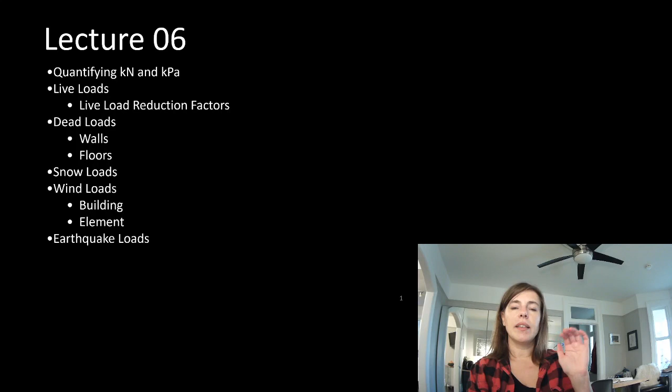So you guys are going to be jumping into the math today. This week and next week, not too bad. I'm going to ease you into it. The last few weeks are math heavy. I have tried to work it out that less of your assignments are weighted because of those heavy math ones. The last 2 weeks are probably the hardest math section, and those aren't marked assignments for you guys. I will give you assignments that you can work on and treat them as if they were assignments. You can even submit the answers. I'll even allow it to show you the right answers right away, but I'm actually going to give you the answer sheet so that you can go through, do it, but then when you're ready, go check the answers, and that's for the last 2 weeks.

You will need to know some of that for the exam, though. They really are kind of the culmination of the entire course, and we have no answers until the end of the last week. Even then, we only have answers for half of our strength equation. Remember, we need our reduced capacity to be greater than our factored load. By the end of this course, we'll be able to calculate our entire factored loads. Next term, we will figure out the reduced capacity. So technically, we won't have any final answers until the end of Structures 2.

So this week, we're going to actually start talking about loads. These are all the loads that happen on our building. We're going to do it in 2 parts because there's enough of it. This is probably the harder week where we have a little bit more information coming at you, and we'll do some math examples.

Obviously, the questions that you guys will have on your assignment are harder than the ones you'll end up with on your exam. The assignment is the place to make it seem the hardest. So don't get too overwhelmed. You will find that the exam is probably a step down in difficulty than the assignments. All of the content will be on there, but the whole point of the assignment is that it is the harder part, where you have the time and luxury to reach out to your TAs, check alternate examples, go back and look at your books, write it out 2 or 3 times, talk to your peers and say, hey, how did you work through this one? I tried it this way. You guys are allowed to communicate.

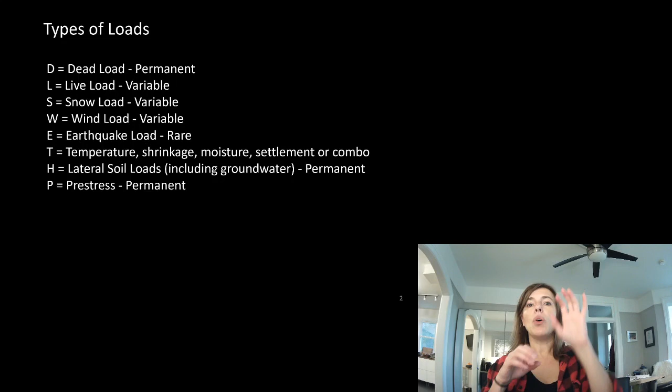Remember, in that factored side of the equation, we don't weight all the loads the same. The weight of the table doesn't change much if Shannon sits on it, goes and eats a cheeseburger, then comes back. But the variability of Shannon's load is higher—does she eat a junior bacon cheeseburger, or a double quarter pounder with cheese, fries, a large Coke, and an apple pie? There's more variability in live loads than dead loads, because we don't want more dead load—that's more expensive, so why waste money building it bigger than needed?

So we don't weight the loads the same, and that's what we'll talk about next week quite a bit.

Let's look at what kPa means—kilonewtons per meter squared. Normally in this course, I'd put a big tape square on the floor that is 1 meter by 1 meter. We're not doing that now, but I'll show you where that comes in later.

So what does 1 kilonewton mean? Before we can even talk about 1 kPa, what does 1 kilonewton mean? I've got three courses going and I've rearranged the order of two of them, so I forget little bits of what I've said to whom. No problem reminding ourselves what 1 kilonewton means.

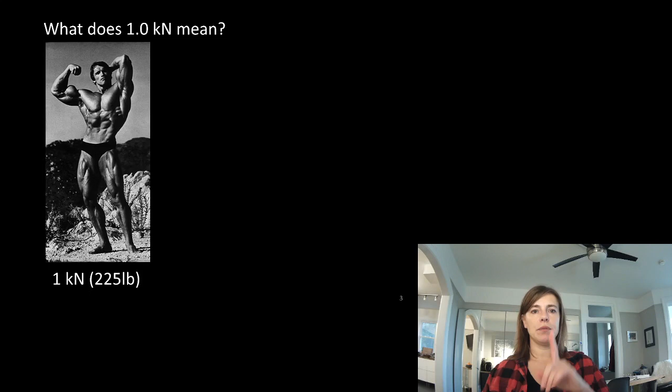I hate using a model, but it's hard to find pictures of people at half a kilonewton. Me back in the day was, but nobody wants to see a picture of me in high school—I was a total nerd, you don't want to see that. So we'll use a famous model lady, who thankfully is heavier than most models for her size—kudos to that, let's support it. This lovely lady is about half a kilonewton.

Me and a couple of my hockey pals, added up, are around 2.44 kilonewtons. Just to give you a sense, switching from pounds to kilograms is already a bit of a throw off, and switching to kilonewtons is probably even harder. For those from England, I'm sorry—you talk in stones, and nobody knows what you guys are talking about.

So what does 1 kPa mean? Well, kPa is kilonewtons per meter squared, so 1 kPa means we have 1 kilonewton spread over a 1 meter by 1 meter square. We take that 1 kilonewton weight and put it on our 1 meter by 1 meter zone.

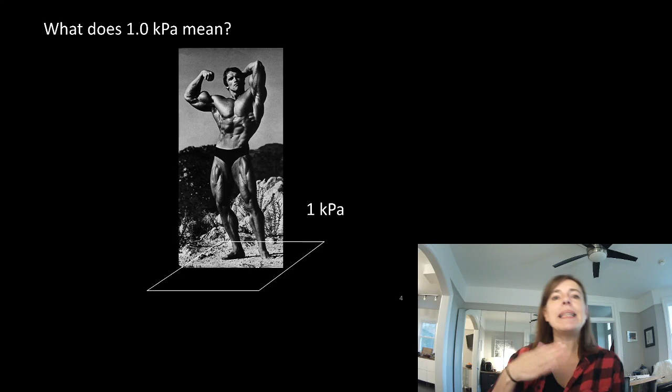Now this isn't a point load in that 1 meter by 1 meter square. What we're really saying is imagine we take Arnold, turn him into silly putty, squash him, and spread him evenly over that 1 meter by 1 meter area. This just helps illustrate what we're talking about.

Are you laughing at me? I just can't—you haven't heard all my lectures. I know, I've got to get Jeff Rosati to do Arnold squashed down into one. Yeah, that's actually probably not a bad image to have. Photoshop.

So half a kPa would be model lady squashed in that 1 meter by 1 meter zone. Half the load on the same area gives us half the pressure, half the kPa. If we wanted the full 1 kPa, 2 of her would be squashed in that little area.

That's just to help you talk about things. There will be some things over the next couple courses that I might refer to in Arnolds, just to help you get your head around what that means.

So live loads vary depending on what our building is and where in the building we are. What's really nice is that you can open up a book and there's a chart that tells you, if you have this building, this is the live load you use. You have access to that chart, it's been uploaded, it's in the downloads section and in this week's module. I'll show you some of the key ones I've pulled out for this.

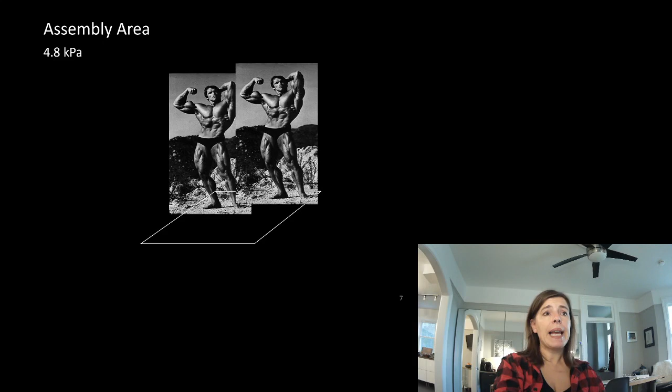An assembly area is our large load, a bunch of people gathered in a space, and it is 4.8 kPa. For those of you old school, 100 pounds per square foot is often how you'll hear it referred to. So 4.8 kPa, that's 4.8 Arnolds jammed into that 1 meter by 1 meter square. That is a whole lot of oiled up person in one tiny little space.

If we were talking about model lady, we need 9.6 of her to equal 4.8 kPa.

That's a lot. This is often where I'd say to the class, okay, I need 4 other people to come stand in the 1 meter by 1 meter square I had taped on the floor with me, and we'd all gather in there. Then I'd point out that probably none of us were actually 225 pounds, maybe a couple people in the class. Most of us range somewhere from half a kilonewton up to 2 kilonewtons, so this is kind of an average. So I'd say, alright, 2 more people join us in the square, and we're probably getting pretty close to 4.8 kPa.

It was always uncomfortable before. In times of COVID, it would be terrible, we'd actually be breaking some laws there. So you can imagine that's not a comfortable state to be in. At 4.8 kPa, you are highly aware you're in a 4.8 loading situation. But it happens. Anyone who was on a subway platform before COVID would have experienced 4.8 kPa. So it is something we do see.

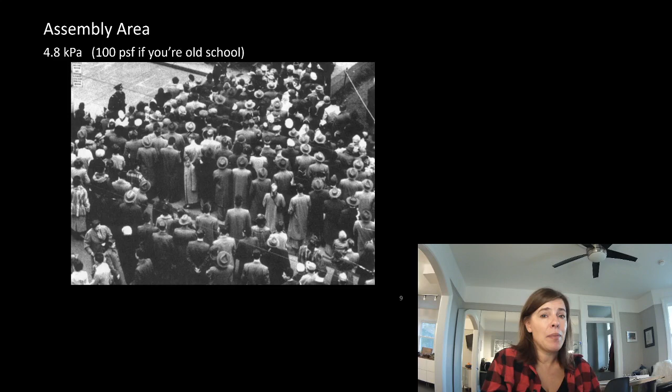So 4.8 kPa, we do see it. In a building we designed for 4.8 kPa, we probably don't have 4.8 kPa everywhere all the time. We're going to talk about that in a little bit.

So bleachers, stadiums, grandstands, easy to imagine 4.8 kPa. I meant to grab a picture of downtown Toronto post Raptors win, where it was just absolutely bonkers, and probably almost every square inch of downtown Toronto was 4.8 kPa.

An assembly area with fixed seating, not counting stadiums because stadiums, craziness happens in stadiums, people lose their minds in stadiums. But places with fixed seating, you don't have to use the 4.8 kPa. The chairs are in the way, you might get a person on it, you might even get people standing on the chairs, but there's objects in the way that make it hard to have that condensed loading all together.

Dave, we can see you. We just about see you. I would love some water and a coffee. You'd be a doll. In a few minutes, okay, yes, take a phone call.

Assembly with fixed seating, we can still have 2.4 kPa. If we were actually having this class where we were supposed to, in the main hall at Daniels, that would be 2.4 kPa on the upper bits. Lower bits, not fixed seating, they can move around—we know they clear them out and have parties in there. That would be 4.8 kPa.

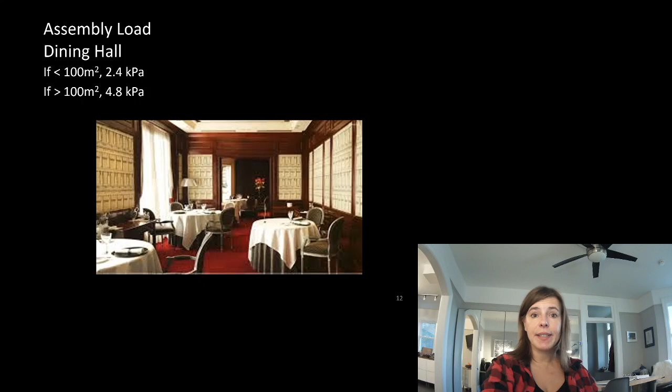Dining halls, if they're under 100 square meters, 2.4 kPa. Over 100 square meters, 4.8 kPa. Why the difference? If you've ever been to a wedding event in a place like that, you know that as soon as dinner is served, they clear out all the tables and it turns into a dance floor, where you would definitely get your 4.8 kPa.

So now we can move into some of the non-assembly loads. An office building would be 2.4 kPa on the upper floors because you rarely would have a party—you might have one, but not a crazy bash kind of party where people are jammed in quite so tight. The ground floor, though, would always be 4.8 kPa. I kind of like this illustration of it, mostly because you can see that this is usually the big grand space.

In fact, most buildings will rent out their ground floor, even if it's an office building, for parties. I know Dave's office at 134 Peter, the ground floor has those big beautiful delta frames in the 4-story space, and that's often rented out for parties.

So why would that 4.8 kPa matter? It's the ground floor—nothing is below you. That would make sense if we had a normal foundation with no basement. But not only do we often have basements, in downtown Toronto, if this is your property line, we often have setbacks for the building but not for the basement. So often our basements are a bigger footprint than the building itself, or we're connected to the path, basement connected to basement connected to basement. So this 4.8 kPa has a really big impact on this zone of design right here.

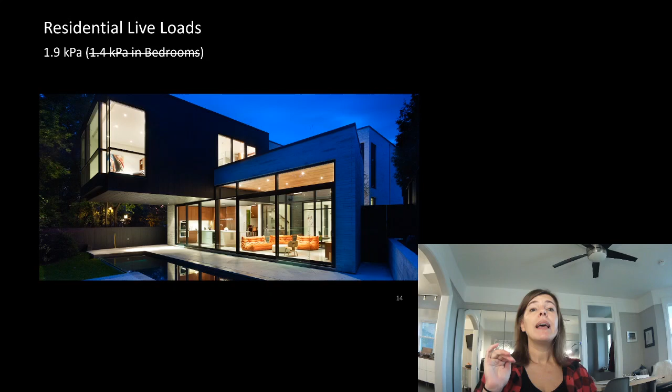Residential live loads: when I first started teaching this course, it was 1.9 kPa in the majority of the house and 1.4 kPa in the bedroom. I don't know what happened in what bedroom to make them up the live load, but it is now uniformly 1.9 kPa in all of the house.

Vehicle loading: people are always surprised that regular vehicle loading is 2.4 kPa, while live load for assemblies is 4.8 kPa. How can that be possible? Well, cars, as much as they're very heavy, are actually spread out over a pretty large area. Now, I'm sure one or two of you are saying, hold up, that load actually comes down on a tiny little zone of 4 spots where we have our tires.

And you're right, that would be the impact on the surface of that object, and we'd have to worry about local punching shear for concrete, for example. But the load for the building floor itself would only be 2.4 kPa. So if you take the weight of any vehicle and divide it by its area, you'd find that we're below 2.4 kPa.

That starts to change if we're talking about heavier vehicles—buses, light trucks, and big trucks. And this one's really important because it has impacts throughout the rest of our design process: 12 kPa.

And that has an impact on driveways, sidewalk areas, and basements, because in our buildings, if we have basements with a laneway right beside them, a truck could come along that space, and it could be 12 kPa of load.

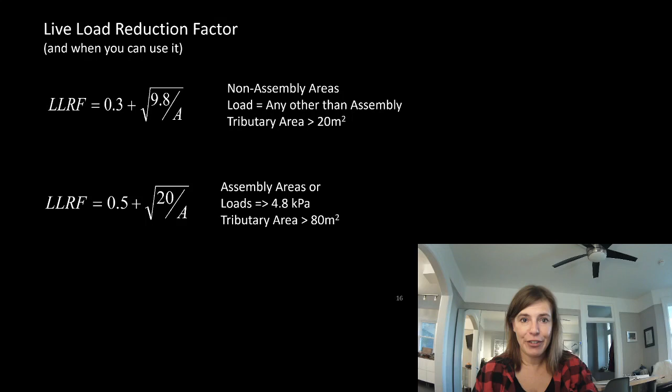It's my birthday, so he has to be extra nice to me today. I get to demand whatever I want, right? You're just gonna bring me grapes and chocolate. I will be coddled all day long. I got to sleep in until 5:30 this morning. It was glorious.

So the odds of all of that area being fully loaded to that maximum uncomfortable load simultaneously goes down. And we will, in a minute, go through a calculation of that.

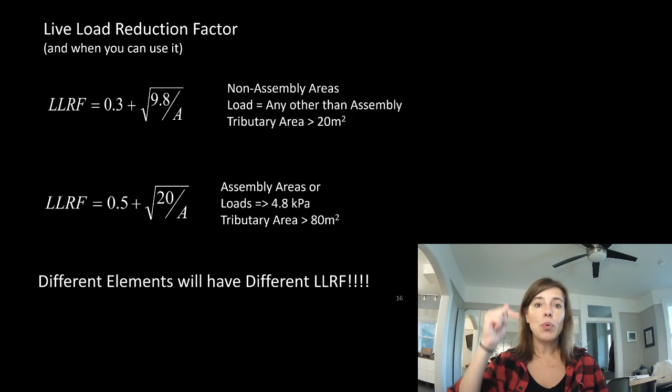So different elements have different live load reduction factors. In fact, a column in a building, as it goes down, its tributary area increases because it's picking up this tributary area from this floor, this floor, and this floor. It could have a larger live load reduction factor on the lower levels of the column than the upper levels. We're going to do an example exactly of that.

The example we're going to look at is live load reduction. We want to figure out the live load on this column, column A1. So on slide 17, we're going to change that to A1.

I'll give you a better image of the whole building, because I've modeled this building so that we could have something to work with going through the course. We're going to use this building through a couple examples throughout the course.

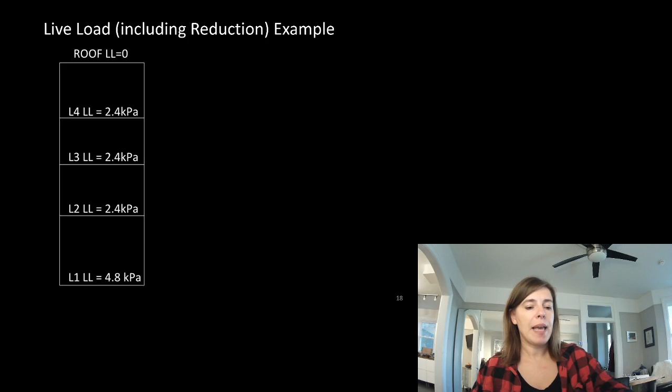So this is our floor plan, and we want to look at the live load reduction factor on this column. We've got a ground floor, level 2, level 3, level 4, and the roof. Level 2 has 2.4 kPa, level 3 has 2.4 kPa, level 4 has 2.4 kPa, and the ground floor is 4.8 kPa. We want to look at the column from level 4 to the roof, level 3 to level 4, level 2 to level 3, and level 1 to level 2. We will go through that example now.

We're going to take a look at our live load example that includes a live load reduction factor. We have a column on a building, and we want to find out what the live load is on it at various elevations: from level 4 to the roof, level 3 to 4, level 2 to 3, and ground to level 2.

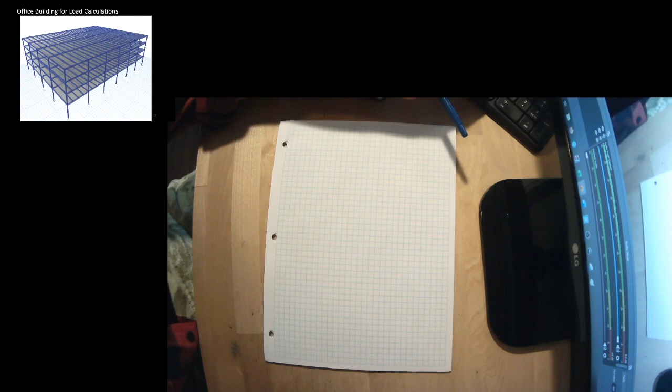We've already been told this is an office building, so we need to figure out what the live loads are for it, then figure out the tributary areas, calculate the live load reduction factors if they apply, and calculate what the load is on the column. Let's take a look at this plan here for a second.

We have 5 bays of 7 meters, so it's 35 meters long in this direction, and 4 bays of 8 meters, so 32 meters in this direction.

We're going to be looking at this column here at A1. It's not great viewing it from this, but there are columns at these intersection points. I'm going to add a better image for you guys to take a look at that shows the columns a little bit better, so it's easier to see what we're looking at framing-wise. Let's just bring that down here a little bit.

Here is a long elevation of the building, and here's the short elevation of the building. They've told us the elevation of each story, and they've asked us to look at column A1, so this column right here.

Now, it's an office building, so we know that the live load should be 2.4 kPa on all of the floors, and at the ground floor it's 4.8 kPa. The roof, they haven't told us that it's an accessible roof, so we don't have a live load that we need to calculate there. People who go open the building code will see that the roof needs to be designed for 1 kPa.

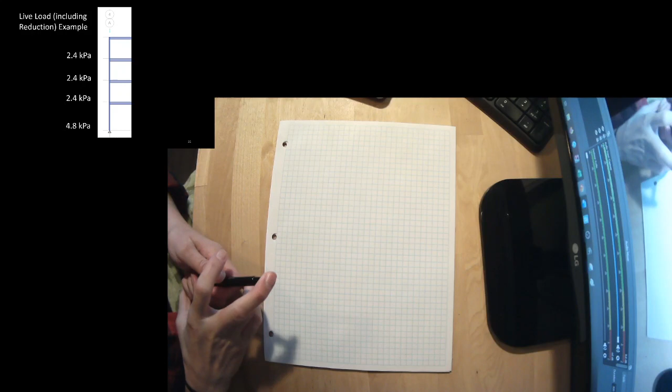It does not need to be included with any other load cases. What we would be including in this would be snow on the roof, which is what would govern. So for all intents and purposes for this course, you can assume that there is no live load on the roof unless it is an accessible roof - so, a party happening up there, or a rooftop kitchen, something like that. For what we're going to be doing, you're going to assume a live load of 0 unless I tell you explicitly otherwise.

So we want to figure out the live load for all of these conditions. Let's start with our calculations. Let's take a look at our roof, and let's take a look at our column going from roof...

...to level 4. So it is supporting the roof. Live load on the roof equals 0. So the tributary area that the column is supporting for live load is 0 meters squared - there's no tributary area that has live load on it on the roof. So that one was kind of easy.

Let's look at, I'm going to start writing it differently - sorry, this was level 4. Let's look at level 3 to level 4 here. The live load on level 4 is 2.4 kPa, and the tributary area from live load at level 4...

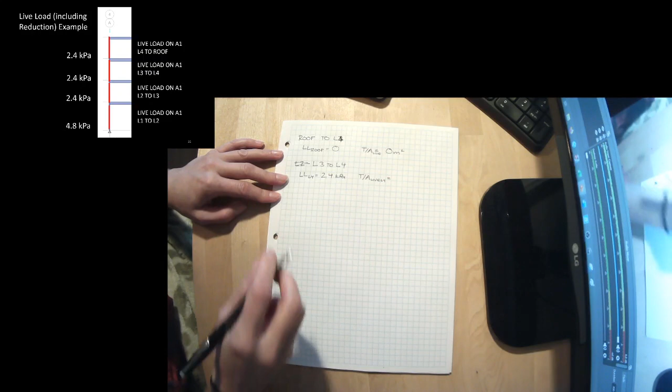Let's just go back to our plans here. It's this column right here, and this is our bay. So it's half of 7 meters times half of 8 meters, so 7 divided by 2 times 8 divided by 2. Let's just take a look at that: 7 divided by 2 times 8 divided by 2, we get 14 meters squared.

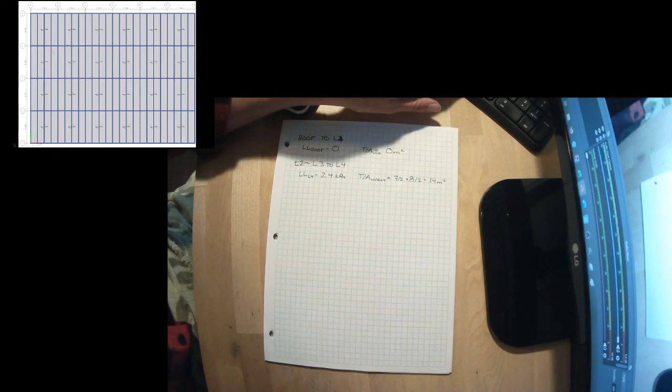Now, can we apply a live load reduction factor on this? Let's take a look. We are not an assembly area - an office building is not considered an assembly area - so we can use this live load reduction factor equation: live load reduction factor equals 0.3 plus the square root of 9.8 divided by our tributary area. But we can only use it if our tributary area is greater than 20 meters squared. So we don't get any live load reduction factor - our live load reduction factor here equals 1. We don't get to reduce it; the factor is 1, so it has 0 impact on our design here.

The column from level 2 to level 3 - this is where it gets interesting. We have the live load from level 4, and we have the live load from level 3. This is 2.4 kPa, and this is 2.4 kPa. Our tributary area from live load at level 4 is 14 meters squared, and our tributary area for live load from level 3 also equals 14 meters squared.

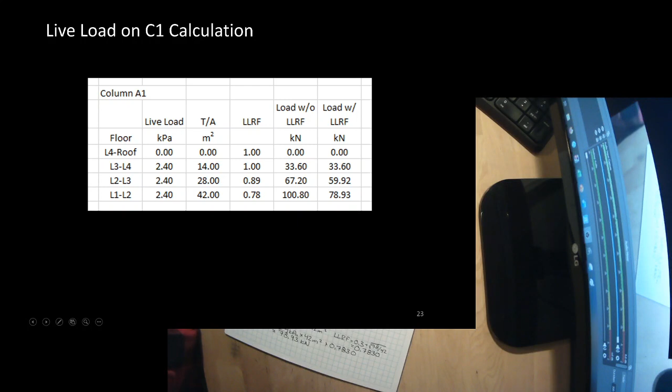Okay, let's talk about dead loads now. Live loads, we know we're picking what type of building we're making. The owner is, and that's telling us what our live loads are. And if we have a mechanical room in it, we'll go look up the mechanical loads. You guys have access to that sheet, and you'll definitely have questions on your assignment where you just have to go look at a list and get information off of it.

Dead loads, we're in control of. Us as the design team are picking the things we build our building out of, and because of that, we're in charge of the dead loads. We have two components that for you guys almost have no real meaning. It matters to me because of the way I model things. A lot of software breaks out the self-weight and the superimposed load. The self-weight is literally the weight of the individual objects in our building. That's only become a broken out component in the past few years, as our modeling software will say your beam is this much and include that specific weight. Superimposed loads are the things that go on it, so that's really where you come in. You guys are picking the finishes, how much concrete topping we might be putting on something, what type of roofing we're using. Those superimposed dead loads often come from you guys.

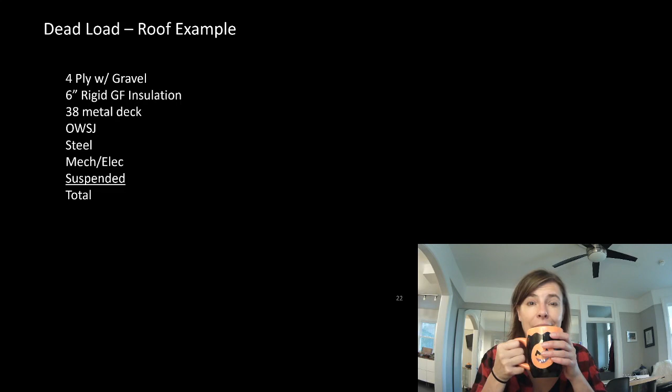This says figure out the dead load of this roof example. We have 4-ply roofing with gravel, 6 inches of rigid glass fiber insulation, 38 metal deck, open web steel joists, some amount for our steel framing, mechanical, electrical, and a suspended load. Let's go take a look at this.

We had 4-ply roofing with gravel. Let's look over here: roofing, 4-ply asphalt and gravel, 0.32 kPa.

The next thing we had was our 6 inches of rigid glass fiber insulation. Let's look at our insulation. Note this says per 100 millimeters thick. We have 6 inches, which is 150 millimeters. So 150 divided by 100, we need 1.5 times whatever they give us in this list. Glass fiber rigid is 0.07 kPa. We're going to need 1.5 times that because we have 150 millimeters, not just 100. This is telling us how much 100 millimeters weighs.

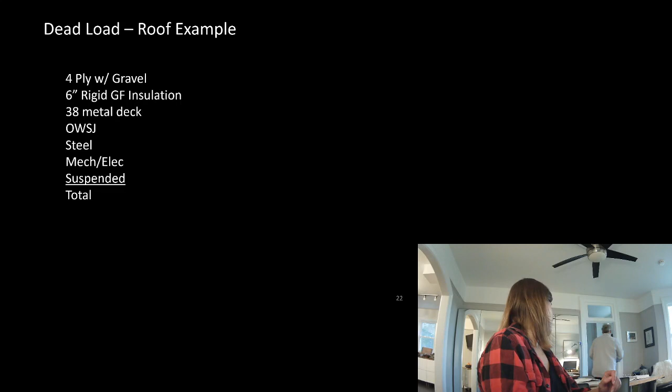We know it pretty much always matches the estimate, so that means I'm pretty good at knowing what the rough estimate for these things is. And you know, it's kind of industry standard—I am going to tell you what to assume. I won't make you guess that. You don't need to go do any math. I will tell you what to assume for an open web steel joist kind of weight.

What we're saying here is not how much individual open web steel joists weigh. Imagine you took all the open web steel joists, pureed them in a blender, and then spread it out like peanut butter over the floor. We're distributing that load everywhere to help us do the calculations for all of the other elements. Same thing with our steel weight—we know there is some cumulative weight of steel in the building, and we're going to smear it out over all the floors to do those calculations. So I will give you those, and I'll show you those in just a minute.

Mech-elec, that's shorthand for mechanical and electrical. Obviously, specific objects would weigh more, like a big rooftop unit - that's something specific that the mechanical engineer has to give a cut sheet for, and we'll look up the actual weight. But this is talking about a general allowance to hang from your ceiling - your lights, ducts, vents, and wiring. So the basic stuff, not the condenser units, air conditioning units, and air handling units - that's specific objects. This is the general allowance.

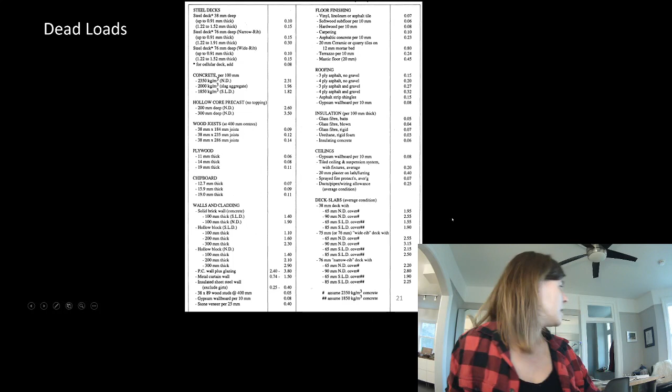Oh, looks like my husband ordered lots of beer. He might need me to sign for that. Oh - he's still in the driveway, so he was able to sign for that parcel.

So 0.25 kPa, loading allowance for mechanical and electrical. The last thing was, I believe, a suspended ceiling - they just said suspended, so we know they're talking about a suspended ceiling. This is the standard crappy metal tees with the insulation board hanging from it. You've definitely seen them in office buildings, probably in a doctor's office. It's the standard kind of ceiling hung from your roof, so it hides all the mechanical and electrical junk.

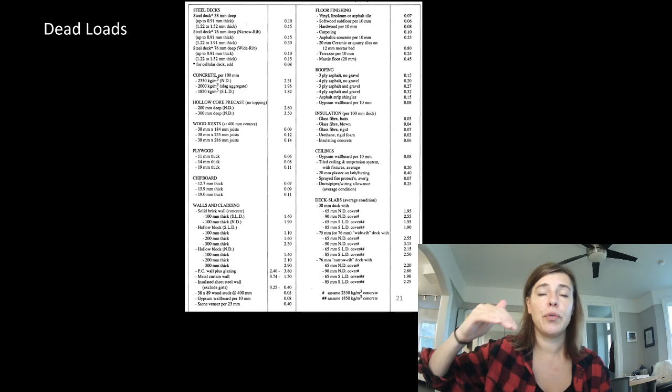Tiled ceiling and suspension system with fixtures, average. So that is our suspended ceiling, 0.2 kPa.

So let's take a look at that. We had our 0.32 for our 4-ply with gravel, our 0.07 times 1.5. You could round up or round down - I'll usually give you a plus or minus 0.01 in an answer, so if you're out by that amount, probably no big deal. You'll still get the correct answer, so if you round it up instead of down, you wouldn't get that wrong.

38 metal deck - we know the normal one is 0.91 millimeters, and that is 0.1 kPa. I've given you what to assume for the open web steel joists and the steel: 0.15 and 0.2. Mechanical electrical, 0.25, and a suspended ceiling, 0.2 kPa. We sum all that up, and we have a total dead roof load of 1.32 kPa.

So we're saying every 1 meter by 1 meter portion of that roof weighs 1.32 kPa. So if we had a 10 meter by 10 meter roof, that's 100 square meters, we'd have 132 kilonewtons, because every 1 meter by 1 meter weighed 1.32 kilonewtons, and we have 100 of those - so 132 kilonewtons, just to give you context.

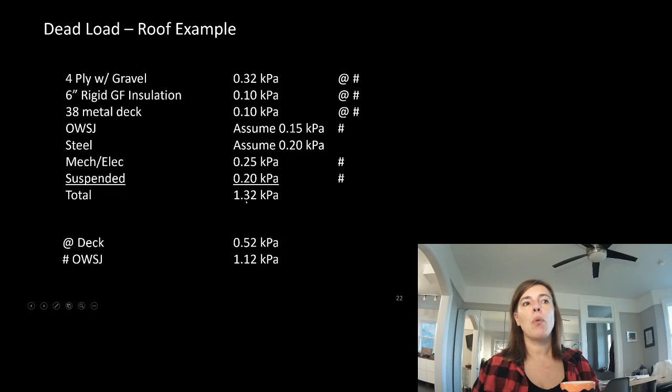Let's do the same thing but for the floor - we'll do it a bit quicker now. We've got carpet, 65 concrete on 38 deck, open web steel joists and steel which I'll give you an allowance for, and then mechanical, electrical, and suspended. These should still be 0.25 and 0.2 kPa. I'll give you these, but we need to look up carpet and our deck system.

So let's look at flooring allowances. They've got a few different flooring weights here. Carpet, they say 0.1 kPa. That's easy, we can look that up. The other thing was the concrete on metal deck.

Do not try to calculate the volume of the concrete. You do not have to figure out how much volume of concrete there is and add it on to the steel deck. Down here we have deck slabs, so a 38 metal deck with 65 millimeters of normal density concrete, 1.95 kPa.

That is our standard concrete on metal deck, our most normal weight for that is 1.95. So our carpet, 0.1 kPa, our concrete on metal deck, 1.95. Open web steel joists and steel, assume 0.15 and 0.2. Mechanical, 0.25, and suspended 0.2. We already looked those up. We sum that up: our floors are being designed for 2.85 kPa.

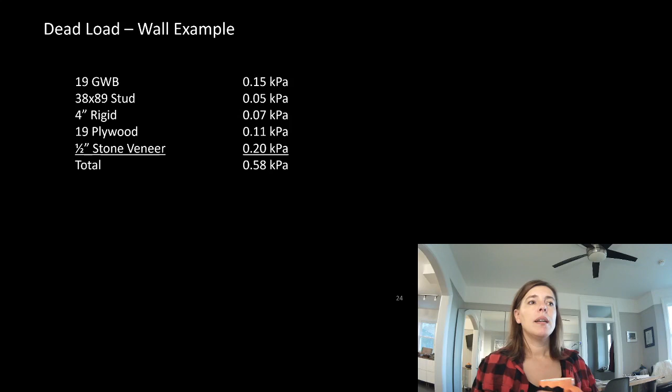Let's talk about the walls.

We've got 19 GWB, that is gypsum wallboard. The very first year I taught this, I had that in the exam, and even though we talked about it in class, people didn't really know that was drywall. I was surprised that it was the engineer telling them that drywall is often called gypsum wallboard. So I'm trying to be really explicit that GWB is our gypsum wallboard, another term for drywall.

We've got 38 by 89 wood studs, 4 inches of rigid glass fiber insulation. I'll just clarify that on slide 24 it's glass fiber insulation. 19 millimeters of plywood and 1/2 inch of stone veneer.

So let's go back and look at those elements. We had 19 millimeters of gypsum wallboard. Let's look at our wall and cladding: gypsum wallboard per 10 millimeters. We have 19 millimeters, and if every 10 millimeters is 0.08 kPa, we want 1.9 times that. So 1.9 times 0.08 is going to give us our gypsum wallboard weight.

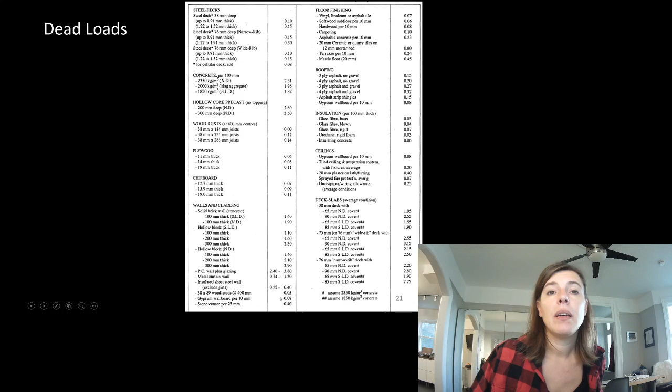Let's zip forward here. So we have our 1.9 times our 0.08 is going to give us our gypsum wallboard value. We looked up our studs, which was 0.05. Our 4 inches of rigid glass fiber insulation was 0.07. Our 19 millimeters of plywood they gave us directly as 0.11. And 1/2 inch of stone veneer we knew was half of 1 inch of stone veneer, so half of 0.4 kPa is 0.2 kPa. So that's a total of 0.58 kPa.

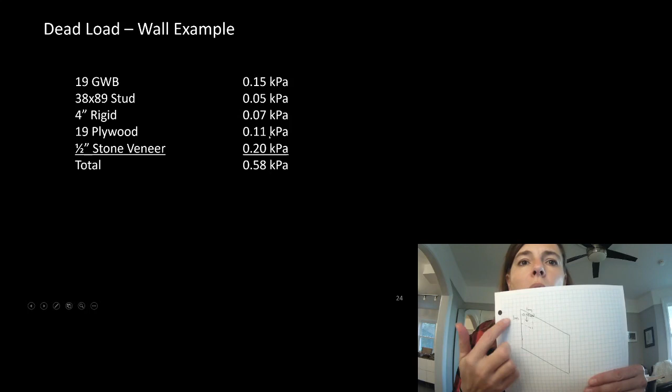Now remember, we're saying that every 1 meter by 1 meter zone of that weighs 0.58 kPa. I'm going to draw you a little picture here. If this is a big wall, and this here is 1 meter by 1 meter, and it is 0.58 kPa, that 1 meter by 1 meter zone weighs 0.58 kilonewtons downward. So we have a series of these 1 meter by 1 meter sections of wall, and each one weighs 0.58 kilonewtons, or we're saying that wall system weighs 0.58 kPa.

And that's going to be important when we need to figure out the weight of the building, for example. And we're going to do an example like that in a little bit.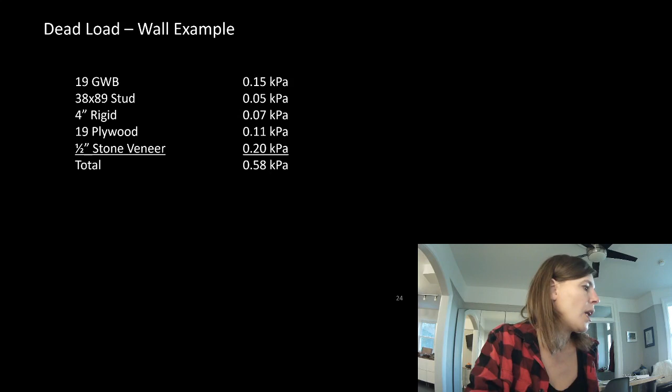Okay, so that's worked out for you here if you want to go through and see that again. I try to always give you worked out examples as well.

All right, now we're going to start talking about the other loads on our buildings. These would often be our climatic loads. We give different importance to these things depending on what type of building it is.

Most of the time your building's going to be regular. If nobody says anything to you about anything else and you don't think of the building as anything unusual, it is a regular importance building. Get that in your head. Don't change it from regular unless you have to. You wouldn't just decide to make it something else for no reason at all, because that's going to increase the cost of your building, and we don't increase the cost of buildings for no reason at all.

So when wouldn't a building be normal or regular importance? A high importance building is when we need to use the building after a disaster, but the building doesn't have to be in working condition after the disaster. Think of after Hurricane Katrina when everyone gathered in the sports stadium - I can't remember which stadium it was. They weren't trying to play football in that stadium, although they did eventually after they repaired it. It didn't have to function. They weren't serving ice cream, hot dogs and popcorn, but people needed a safe place to gather.

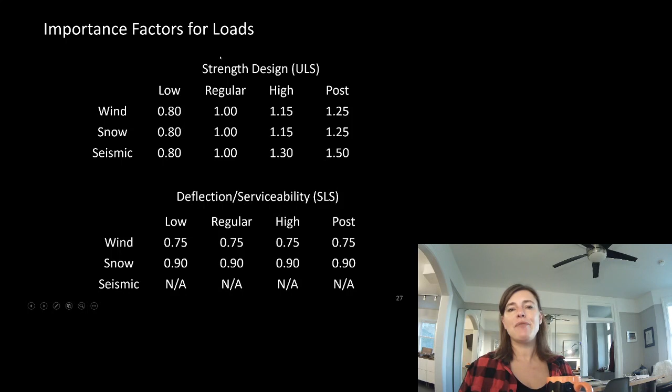Now, we've talked about ultimate limit states design, or ULS, and this is our factored load. We're going to be using these to calculate our factored loads. We haven't added our factors yet. This isn't our factors, as much as it says factors right here. This is an importance factor. We're going to actually do the load factors next week.

But down here, we have a separate category, and this is serviceability. Remember how with deflection, we have dead and live, dead and snow, or dead or live, or dead or snow or live by themselves? Well, for those values, when we're talking about deflection and seeing how much things actually move, we just care about damages to finishes. We don't need people. It's not a life safety event.

So we actually use lower loads. No matter if it's low, regular, high, or post-disaster, we use the same serviceability requirements. So for wind, we only use 75% of the wind we would use for strength design. And for snow, we only use 0.9 of the snow we would use for our strength design.

So we will need to start thinking about tracking both our ULS and our SLS values. We'll talk about that more next week, but for now I just want you to be aware that you're tracking both of these.

Okay, let's start talking about our first climatic data situation, and that would be snow load. So snow load is calculated from the code. We have an equation here for our snow load. It involves the importance factor for snow, and then here is our equation.

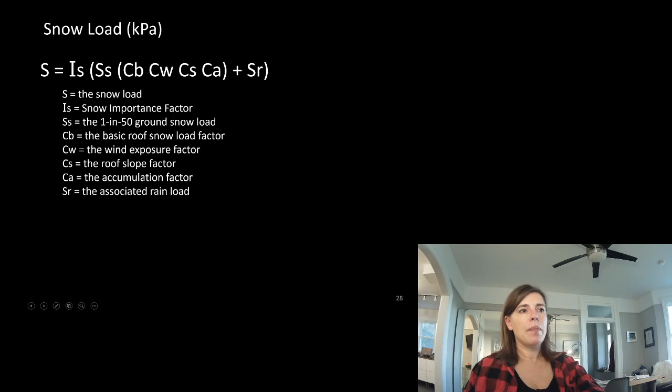All of these C values are all factors that we apply to our snow load depending on various conditions. So these are all about our building itself. I'm going to go through those with you.

If you find doing a little bit of calculation help is helpful, you can go to this site. I have no problem with it. Check it out - a lot of engineers use it. I'll use it sometimes to just double check some stuff.

So climatic snow data: the ground snow load with a 1 in 50 year probability of occurrence in a year, based on measured depths and densities for locations in Canada. And then SR, the rain which may fall into the snow cover, increasing its weight. So I've given you guys an upload, which is the Ontario climatic data from the National Building Code of Canada, and then I've cropped a section of it.

So I've looked at Toronto. Toronto, because it's a mega city, is broken up into actually 4 categories: Etobicoke, North York, Scarborough, and Toronto City Hall.

So let's come over here. The snow load in KPA for a 1 in 50 year event. We have our SS and our SR. You can see that North York and Scarborough see quite a bit more snow, 30% more snow than Toronto City Hall.

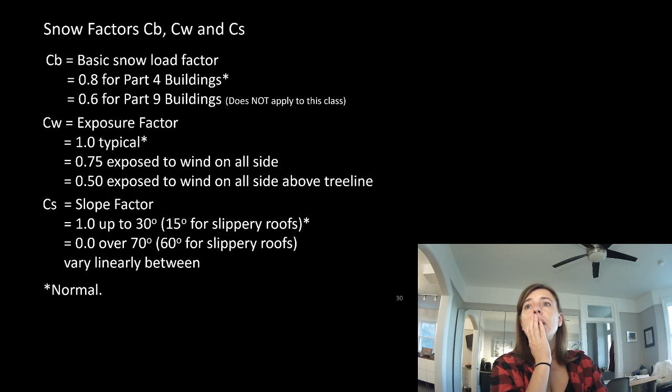Where it might be helpful is in a spot where snow loads are ridiculously high. Northern Quebec might be a good spot to look at steep roofs. Northern BC or in mountainous regions might be a good spot to include that or pitch your roof. You can actually see that style come up in spots where it's advantageous - like the Northern Alps, you might see A-frame style construction. Moscow, Russia, where they have higher snow load values because they're actually much more north than us, they have that kind of onion dome shape to shed the snow load off of the roofs.

Here, not that much of an advantage. I'm not saying don't make a sloped roof, but don't do it to save the world by getting rid of your snow loads. It's not going to have that much of an impact.

You will have one on the assignment where it's going to be somewhere between 30 and 70 degrees, and you have to figure out what factor you could use. It varies linearly between those two. So at 30 degrees, the factor is 1. At 70 degrees, the factor is 0. At, say, 50 degrees, which is halfway between 30 and 70, it would be 0.5. Your factor would be 0.5.

That might be literally the example that you have to do in the assignment. I'm not saying I would just give away the answer. I wouldn't be so crazy. I wouldn't do that, would I? Yes, I would. It's going to be 0.5. Now, the last one is the accumulation factor.

Way beyond this course for you guys to calculate it, but it is super important for you to understand that it exists. So the accumulation factor is saying, and you guys have all seen it, if you have a building that is lower beside another building, you're going to get snow pile up there. If you have a mechanical unit on your roof, you're going to get snow pile up there. If you have a parapet on your roof, you're going to get snow pile up around that parapet.

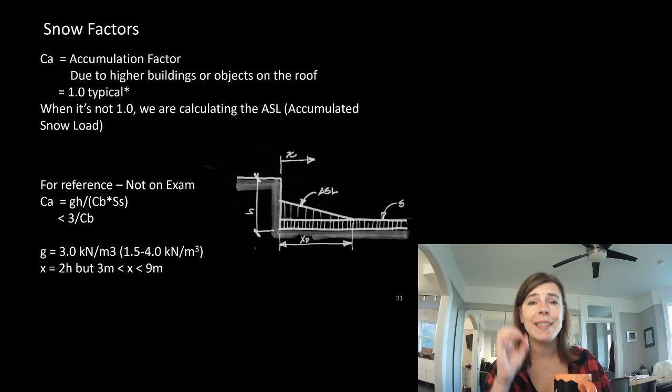It does not mean your factor is 0. That would mean you have no snow load. We're not saying you don't have snow load. We're saying you don't have this extra bit of snow load. And I'll show you what I'm talking about.

So now we're going to do an example, and like I said, this is building off of the same building that we looked at live load with and dead load with.

We have, this is even the wrong value of the building. My values are screwing up. So you guys are going to see a slightly different question here, and when I do the math, you will have that one as well.

The dimensions are... I'm going to include images of the building for you guys so you can kind of just see what we're talking about. And we're going to figure out what the snow load on the roof is, and we're going to look at the ultimate limit state's value for the importance factor, and we're going to look at the serviceability case importance factor. And then we're going to calculate, just for fun, what would happen if it was actually a high importance building. And then we're going to look at what the total load on the roof is in kilonewtons. It's not a calculation we normally do, but I just want to give you a sense of what the total value of snow load is that falls on our roof. So we're going to do that. We're going to do this calculation now.

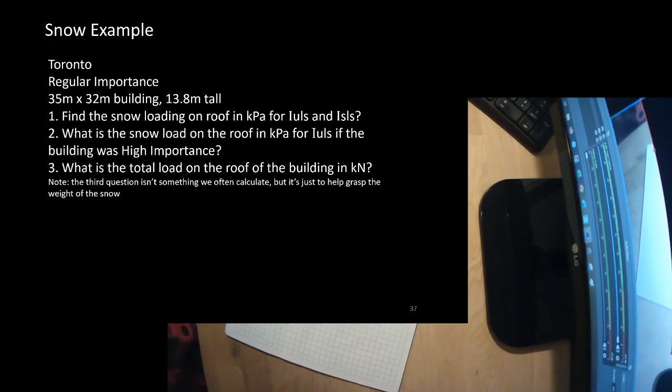They want us to find the snow loading on the roof using for strength and for serviceability. And then we want to know, what would that be if it happened to be a high importance building? And then they've asked us to calculate the entire snow load on the building. Not a thing we would normally do, but it's just to help give us some context here.

So we know that our snow load equation equals our importance factor for snow times our SS times our CB times our CS times our CW times our CA plus our SR. Pay attention to your brackets here. This tends to be a real way people make mistakes. So double check and remember your order of operations. You multiply these, then you multiply it by that, then you add that, then you multiply it by your importance factor.

We can look up our importance factor for snow. For ULS, for a regular importance building, it's 1. And for our serviceability, it's 0.9. So when we do our serviceability calculation, we get to reduce the snow load we're looking at.

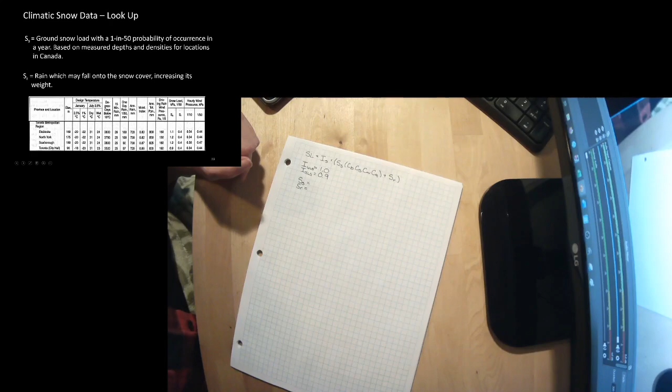So they've said it's in Toronto, we can go and look up our SS and our SR. Let's maybe go back a few slides. Here we go, we have for Toronto, Toronto City Hall, if we come along here, we have SS is 0.9 and SR is 0.4. So let me just bring back our calculation here. They've given us, based on the fact that we're in Toronto, 0.9 kPa for SS and 0.4 for SR.

CB is a factor that depends on the fact that the snow is falling on the roof and not on the ground. Now if this was a really, really large roof, like a big factory or something like that, that CB can start to be bigger than 0.8 because it gets big enough that none of the snow is kind of falling off the roof. But for most of the buildings we're talking about, CB is going to be 0.8, and that's pretty darn normal. Do not use 0.6, which is part 9 of the building code.

CS is our slope factor. So if our roof is sloped, we would get, if it was sloped a certain amount, we would get to assume some of the snow was sliding off our roof. This is a flat building. We've looked at the drawings, we've seen that it's a flat roofed building, so we do not get to assume any of the snow slides off the roof.

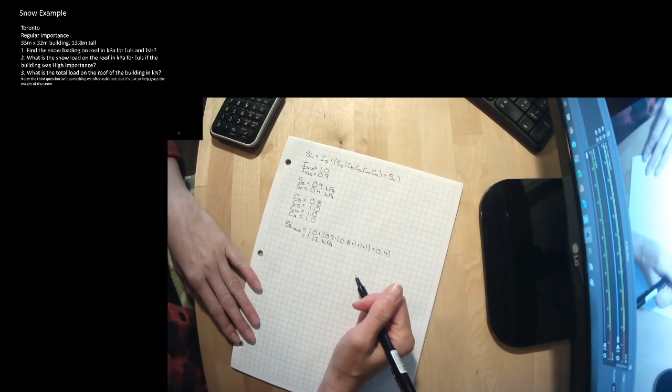They actually asked us to check out what the snow load in kPa would be for our serviceability version of this. So 0.9 times 0.9 times 0.8 times 1 times 1 times 1, plus 0.4. When we calculate this, we get 1.008 kPa.

Now, the other thing they asked us was, just out of curiosity, what if this was a high importance building? It's not, it's a regular importance building, but this is just to take a look. The only thing that changes is that our importance factor for snow now becomes 1.15. Our importance factor for serviceability stays the same. SS, SR, CB, CS, CW, and CA all stay the same. The only thing that's changing is this right here, just that one number.

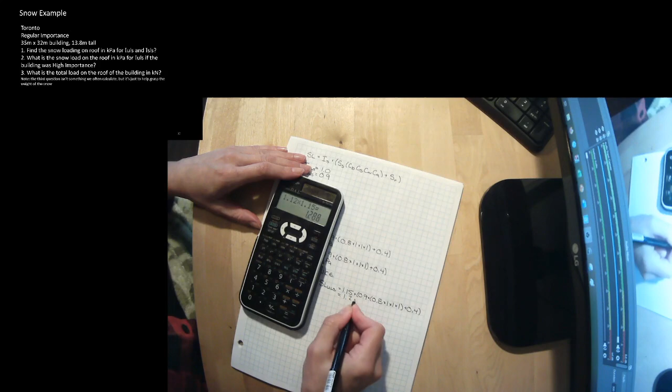So in this case, our snow load would be 1.15 times 0.9 times 0.8 times 1 times 1 times 1, plus 0.4, or 1.29 kPa. Our SLS value is going to stay the same. We could write that down if we wanted, but we know that it's not going to change. So this was just a kind of funny little side lark that we looked at.

They then asked us for the total snow in kilonewtons for our regular building. So what is the entirety of the snow load on this building? Well, we've calculated that our snow load equals 1.12 kPa.

The roof area equals 35 meters times 32 meters. Let's take a look at that. 35 times 32 equals 1,120 meters squared.

So let's still call it our snow load, but make sure to write that it's in kilonewtons here. It's going to be 1.12 kPa times 1,120 meters squared. kPa is kilonewtons per meter squared, so we're left with something in kilonewtons. So 1.12 times 1,120, and we end up with 1,254.4 kilonewtons. Or it's like we have 1,254 Arnolds laying all over the roof, and that's the equivalent of the snow load on this building.

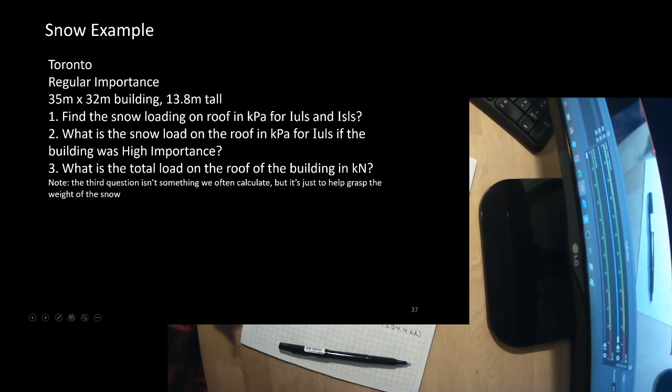We can just take a look at that here. You can see that I did this calculation all the way out for us, and I calculated the snow load for strength and serviceability, and then I did it for fun, looking at it as if it was a high importance building. So you can see serviceability doesn't change, and that's because our importance factor doesn't change. That note right there should be changed to high importance factor. I'll update that one little line here that this is saying at high importance factor, but you can see that the calculations carry that through. So that is our snow load example.

Okay, so let's take a look at rain loads. Rain loads don't often govern for us here in Toronto, and I'm going to show you why, but also why sometimes it matters. So every roof has to be designed to support a 24-hour rainfall. The idea is that even if you have scuppers and drains and whatever you have up there to drain the water off the roof, we assume that, especially at this time of year, leaves can clog that up, maybe ice clogged it up, and the water can't drain. The assumption is that after 24 hours, you would know that you had a big pile of water on your roof, and somebody goes up and manually cleans the drains or does something to make the water leave the roof.

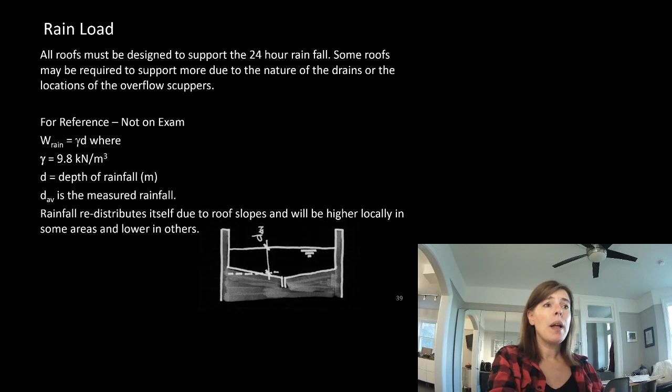We think of the roof as flat, so it doesn't really have any kind of consequence on us. But that volume of rain in 24 hours is falling, and it is sitting on that roof. But as you slope to drains, that water redistributes to have more amount over the drains, that clogged drain that we have to assume is there. And so I like to show this kind of diagram. This is how we picture our roof as flat, and that 24-hour total volume of rain falls on our roof. What we actually have is sloped drains.

Now, I have highly exaggerated these slopes. Don't worry about that, it's just to illustrate the point. The same volume is on the roof. So this volume and this volume, or looking at a 2D cross section, this area and this area are the same, or the same cross-sectional area. But look at how much water is right here. If we had a beam here and a beam here and a beam here, and that's our tributary width, that beam is carrying an awful lot more of that rain volume than those two would be. So it might have an impact locally on elements.

Now, I'm sure there's other places where it would have a big impact. But in Toronto, snow always governs over the rainfall, except locally due to sloped roof drains, just sloping our roof to our drains. We could locally have an impact where things are under this higher volume. Now, again, this is exaggerated, it's not even this obvious. It might just govern when it's the rainfall. And think of, I don't know who was around in Toronto, I think it was in 2013.

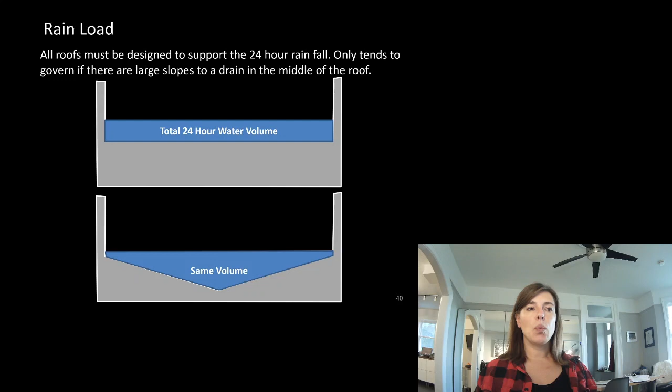In Toronto, Etobicoke, North York, Scarborough, our 1 day, 1 in 50 year rainfall: Toronto City Hall, 97 millimeters. Etobicoke, 108 millimeters is our 1 in 50 year, 24-hour rainfall. In 2013, in 2 hours, Etobicoke had 127 millimeters of rain. So we annihilated that 1 in 50 year rainfall event.

Now, consider the fact that we factor up our loads and we had no buildings collapse. There might have been local damage, and there was definitely flooding, but we didn't have any collapse events. We're in the midst of the entire world's climate change, so we will start to see these values change. But we didn't have a life safety event simply because we factor up these loads. These 1 in 50 year events are coming more and more often.

Okay, so we looked at our rainfall. Let's talk about wind now. Wind is a more complicated calculation, and you're going to have to do some of it. I'm not going to be that mean on the exam. You might have to pull some data or do a tiny quick calculation. Even on your project, I will only make you pull the climatic data for your building.

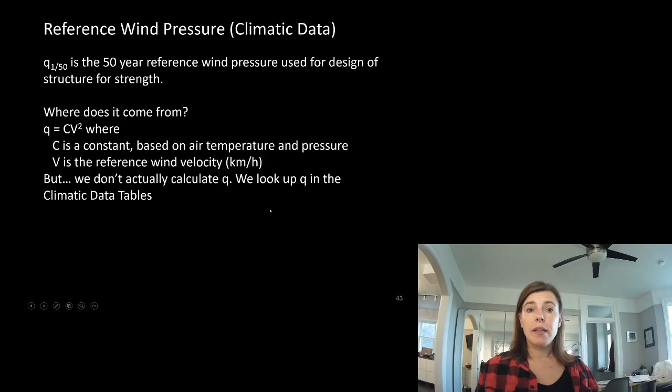So Q, we don't actually calculate - we get to look that up in our climatic data tables. This is the same one we looked at for snow. We can see here Toronto City Hall, our 1 in 50 hourly pressure is 0.44. Etobicoke, same value. North York, same value. Scarborough has a slightly higher wind load than the rest of Toronto.

So CE is the exposure value. If anybody has ever read Ken Follett's Pillars of the Earth, you know that they were trying to build this massive cathedral, and as it got taller, they were having more and more trouble, and it kept falling down until they realized that the wind got higher - the wind values were higher as they got higher and higher. And they magically solved all that with no math, but they figured it out and started to build the building better because of that. We actually calculate that value.

Our exposure factor is the height of our building divided by 10 to the power of 0.2. But we use at least 0.9. If you had a building that was only 1 meter tall, you'd get a CE value that was really, really low, but we have to use at least 0.9. At around 10 meters, it's 1, and higher than that, we start to increase our CE.

If we were in rough terrain, this is saying that our building is protected from things around it - the exact opposite of our snow one, we can lower the wind value. Do not use it, and I'll tell you why. I used to have a photo that has disappeared and I cannot find it anywhere. We have to assume that the building beside us could be torn down. The kind of classic Toronto building is a narrow, long building and a whole bunch of them kind of connected together. There was a building on one of the streets, John maybe, where they tore down all of the other buildings like it, and this one was standing all by itself, and it had a restaurant in it. That would have assumed that there was 10 other buildings kind of tied together with it. But we now have to assume that all of those other buildings could be torn down, because they could, and we've seen it happen. So it's really hard to assume that you get to use this rough criteria. So we will be using our CE equals H divided by 10 to the power of 0.2.

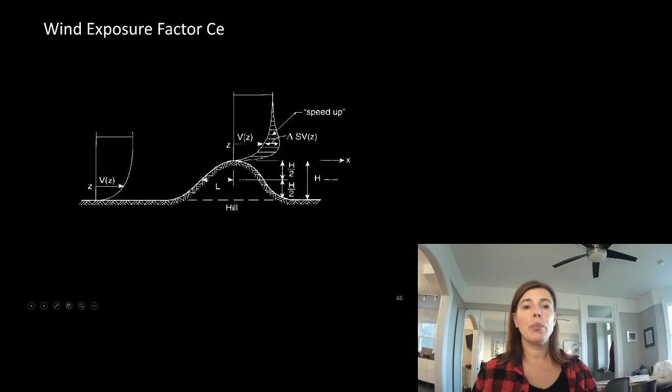When wouldn't that be enough? Well, if we're saying that the wind goes up as we get higher, if our building is perched on the side of a high cliff, well, we're already starting at a high value. So that exposure factor is already peaking somewhere at the top of our hill. When I did the Solaris building in Goderich, I believe, it was perched on the side of a really high cliff. So our CE value, kind of even before we talked about the building, was like 1.3 or something like that.

Gust factor is often combined with CP, but we can break it out to talk about it. It's the ratio of the maximum effect of the load to the mean effect of the load. I like to think about it this way - have you ever been standing outside and you can feel the wind blowing, but you can see off in the distance there's a tree that's really moving around. Then that tree stops moving, and a couple seconds later you feel the wind strongly. What we're saying here is that a small object would feel that full gust over its full area. But as our area gets bigger and bigger, say all the way from that tree to me was a building, over there it's feeling that gust, and then over here a bit later it feels that gust. So the whole surface doesn't feel that gust all at once, and so we distribute that over the entire surface - we're kind of averaging out the gust to the average wind simultaneously.

So it has the short duration versus the long duration of the mean wind. The fluctuation, like I said, the tree moving over there, me moving, being affected by it over here. And even the motion of the building itself can be broken into it.

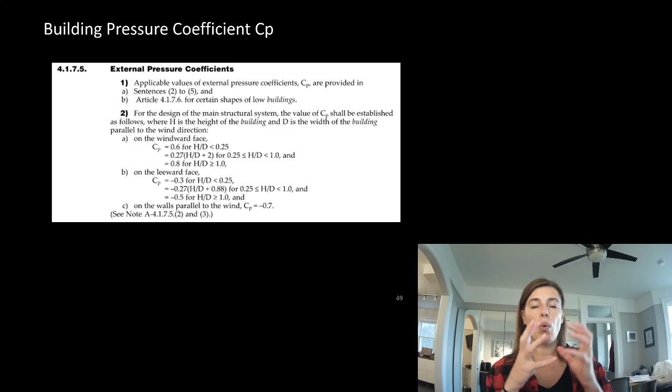So CP is the pressure coefficient. There's not much to say about it, except that it varies depending on the area of the building, and the proportion of our local size compared to our overall size. If a building is low, we combine it with CG. So here, I'm not going to even make you go through this.

Here are the calculations for CP for most buildings. But if we meet this clause here for certain shapes of low buildings, we don't have to use this clause. We go on to a different clause.

I've been finding lately that the low building clause used to be applicable to the majority of the buildings we were designing. And over the past 2 codes, that's gotten harder and harder to achieve.

I just did a building for an architect where a house didn't meet the low building clause. Because it's not just about it being low, it's about its ratios relative to each other. This building was so narrow compared to its height and its length that it did not meet the low building criteria, which meant the design wind pressures were much higher. All of a sudden, plywood shear walls didn't do the trick, and we had to put steel brace frames in, and everybody was very mad.

Even though I gave them the heads up very early in the project, the builder came onto the project and said, 'You're crazy, I've never done anything like this, you're a horrible engineer.' Obviously, it made me second guess everything.

I went back and reached out to a bunch of other engineers just to say, 'Hey, are you finding that this is the case?' And they all unanimously said that in 2015, the building code, which came into effect last year, or for anything being built this summer, we had to start using this clause. So that house was one of the first things that kind of got hit by it.

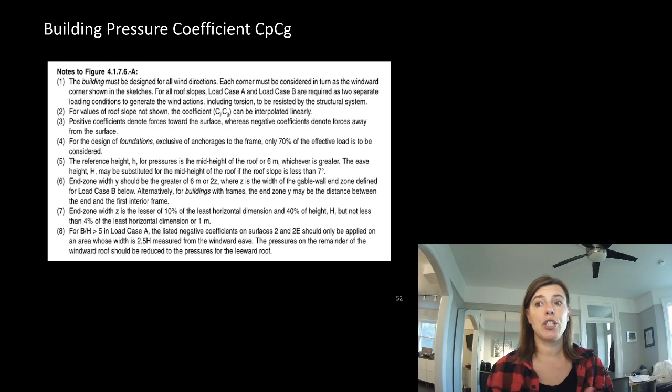Don't worry, in the assignment I tell you what the end zone is, so you're not going to have to go through and do that calculation. We're going to do an example where we actually do the calculation though, at the end. I'm going to finish talking about wind, and then we're going to do one building calculation as a whole.

So let's talk about internal wind pressures. We still have Q as our reference wind pressure, that's the same value. So the wind outside of the building has an impact on the wind inside the building. Because if you've ever been in an apartment building on a windy day, you know that the elevator shaft rattles. The things in that are being impacted by the wind outside.

So it all has a trickle-down effect. We have our same importance factors, it's the same exposure factor. We have our CpCg for external elements, and then we have CpCg for elements internally.

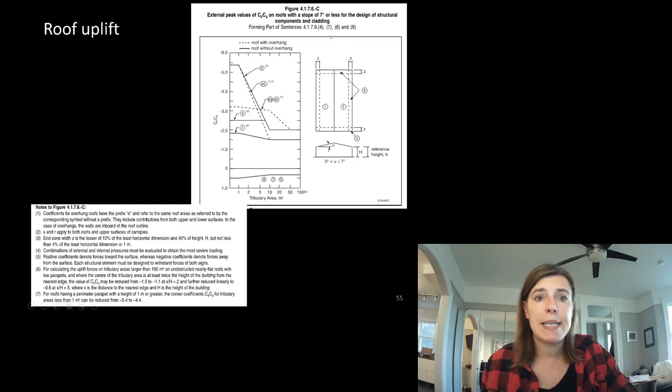That was the external elements. Here are components and cladding as well, so there's a few more. This is for the roof. We would do the same thing, we would look for the wind uplift value on the roof, or downward force for the roof. And then we would have to combine the interior wind load - I'll come back to this calculation.

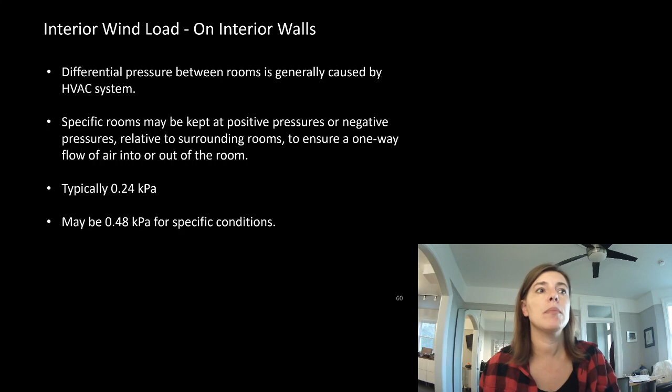Now we're going to do our wind load example. We have a building in downtown Toronto, regular importance, 35 meters by 32 meters, and 13.8 meters tall. It's got a flat roof, so we don't have to worry about anything there. They're asking us to find the windward and leeward wind load in the regular zones and end zones in kPa, including an importance factor for strength and an importance factor for serviceability. So it looks like we have windward, leeward, regular zone, end zone, and serviceability and strength - that's a lot of different answers. Then they ask what is the total wind load in kilonewtons in each direction for both ultimate limit states and serviceability limit states.

Now, in snow load we don't often calculate that total value, but in wind load we often do calculate it, because we're looking at the base shear - all of that wind blowing on the building is trying to slide it, and that really becomes meaningful at the ground. We talk about it as base shear, and that becomes handy because we often want to know what governs, seismic or wind. Sometimes they're pretty close and we need to investigate both. But if our seismic load is 10 times our wind load, that's probably the one we spend more time thinking about when we design, or vice versa, maybe wind is 10 times seismic. Being able to talk about those base shears becomes very handy. Often, especially for the City of Toronto, we actually have to include on our cover sheet what the wind base shear is and what the seismic base shear is.

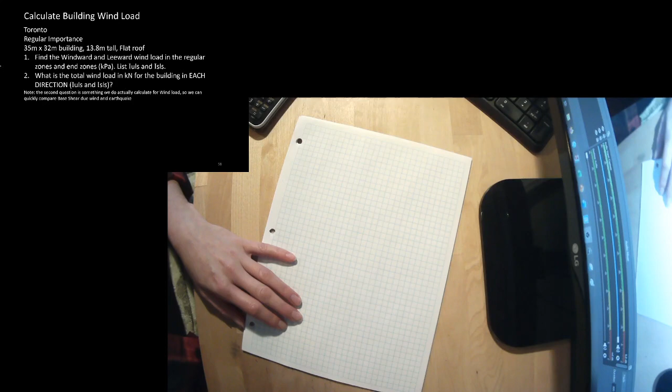Let's start by writing our wind load equation. Wind load is our importance factor times our climatic wind data that is provided to us, times our exposure factor, times our CP factor, and our CG factor. If this is a low building, we know CP and CG will be lumped together. So let's take a look at the fact - is this a low building?

So to be a low building, H had to be less than 20 meters. Our height equals 13.8 meters. But there was two clauses. The other clause is our height less than 0.5 times our shortest dimension, which is W for us. Our height equals 13.8, and 0.5 times our W is 0.5 times 32, or 16. 13.8 is less than that. Yes, so we get to use the low building example.

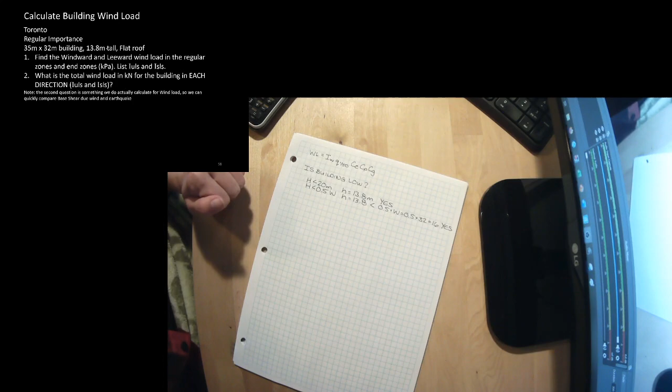Okay, so our example here, we do have a low building. That means we get to use that handy diagram that I showed you, where it lists the CPCG values for us. So let's just go back and take a look at that diagram. So here it is right here.

So let's come right here. Because I have this big right now, let's actually pull out what our CPCG values are for our end zones and our regular zones. We know there's four different values that we're gonna need. We're gonna need it in the end zones for windward and leeward, and we're going to need it in the regular zones for windward and leeward.

So let's look at our 1E value, or our end zone in the windward direction. We have a CPCG of 1.15. In our regular zone, we have 0.75. And in our 4E and 4, which is our end zones and regular zone on our leeward side, we have minus 0.8 and minus 0.55. But that is really just saying that our wind is blowing in that direction, and they're both going in the same direction. So I'm not going to worry about the positive and negative too much for this, just because I know that they're all acting in the same direction.

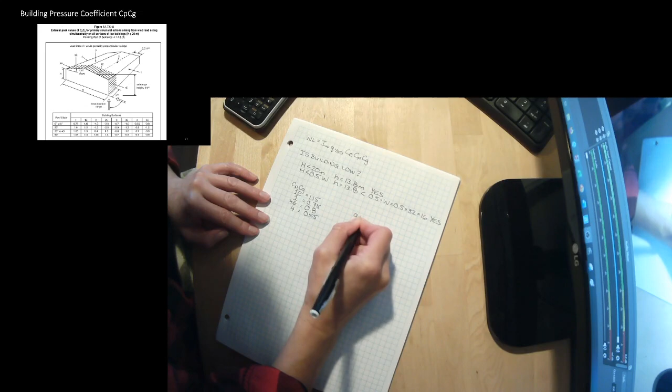We still need to figure out what our Q is. So what's our Q 1 in 50? We know that that's from the climatic data. And for Toronto, our hourly wind pressure for a 1 in 50 year event is 0.44. So our Q equals 0.44 kPa.

CE is our height divided by 10 to the power of 0.2, or for us, 13.8 divided by 10 to the power of 0.2. We can plug that into our calculator, and we get 1.0665. Let's keep a few digits. You would not need to keep this many significant digits, you could do 1.07 - I'd be totally okay with that. I'm just going to keep a few right now, just so we can kind of hold on to our numbers.

The last thing we don't have is our importance factors, our ULS and our SLS importance factors. For wind, for a regular importance building, our importance factor is 1, and for serviceability, it's 0.75.

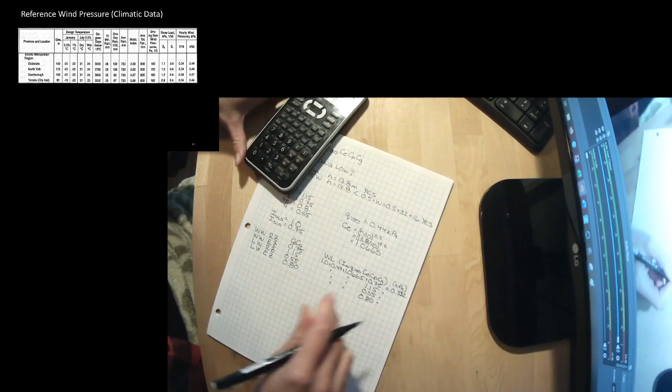So we calculate that as 0.540, 0.258, and 0.375. That's all in kPa. So that gives us all of our wind pressures in those zones. We have a higher pressure at the end zone than we do in the rest of the building, and we don't know how big that is. That seems important, but we've figured out our wind load pressures in all the major spots for the question they've asked us to look at.

They've asked us to also list these values for serviceability, which is basically all of these times 0.75. So let's do the same thing for serviceability. This would be our wind load for serviceability. We could put a ULS label here. We've got it for our windward regular zone, windward end zone, leeward regular zone, and leeward end zone. Everything is the same here except those are all multiplied by 0.75.

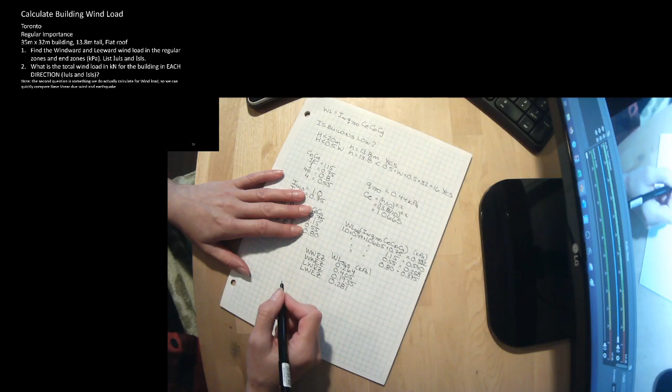Now, the thing it really asked us to do is figure out what the total wind load for the building is in each direction. To figure that out, we really need to know what the end zone is. So if you guys remember, we have this zone here that really is our end zone, and we need to figure out what that dimension y is. There were some clauses here on how to calculate y.

I am not going to make you do that. I have done it in my spreadsheet and it's worked out, but I am going to tell you that the end zone is equal to 6.4 meters. You can follow my spreadsheet and do that calculation looking at these clauses if you'd like, but I am not going to make you do that - I've done it here for you. What I really want to do is talk to you about the calculations of the building as a whole.

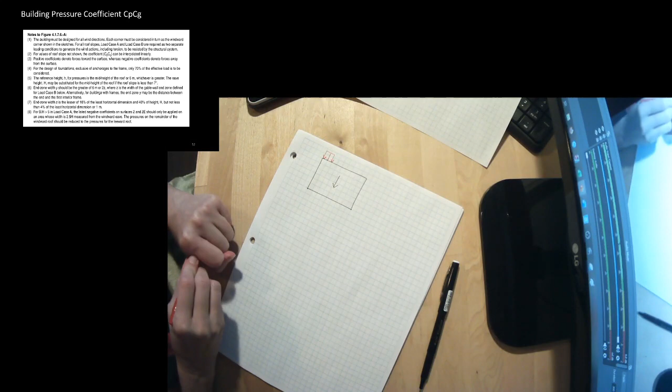So we have our building in two directions. Let's talk about it first with the wind blowing in this direction. We have our windward end zone. We have our windward regular zone. We have our leeward end zone - I don't think I have another color, woe is me, I'll use a pencil to represent our last color. And then we have our leeward regular zone. And we know what the Cp,CG, or the wind load, is for these.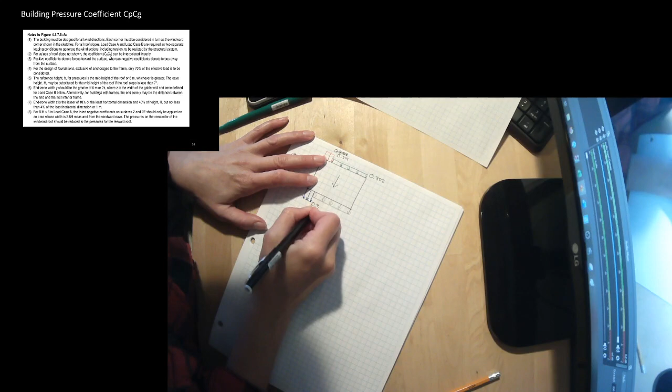We know that this was 0.352, we know that this was 0.54, this is 0.352, we know that this in our end zone is 0.375, and we know that this is 0.258. All of them are going in the same direction. We know that this building is 13.8 meters tall, so there's a height associated with this.

So we really now just need to know how long each of these lengths are. Well, I told you that's 6.4 meters, and we know that the total length in this direction is 35 meters, which means that length must be 35 minus 6.4, or 28.6 meters. So the wind load in, let's call it our north-south direction, equals 13.8 meters tall times, and then we have 6.4 meters times 0.375 plus 6.4 meters times 0.54 plus 0.352 times 28.6 plus 0.258 times 28.6.

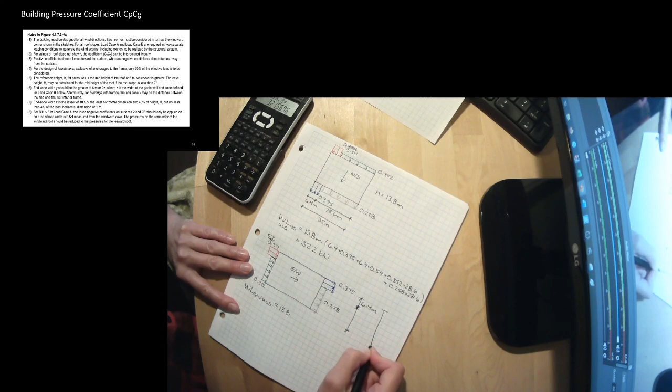We can calculate the wind load in the east-west direction for our ultimate limit states design. We've got 13.8, and that dimension I told you is 6.4 meters. The overall dimension here is 32 meters, so our regular zone is going to be 25.6 meters. So we have 13.8 times 6.4 times 0.54 plus 0.375 - it's just a different way of writing the exact same thing. Plus our 25.6 times 0.352 plus 0.258, big bracket to end it all.

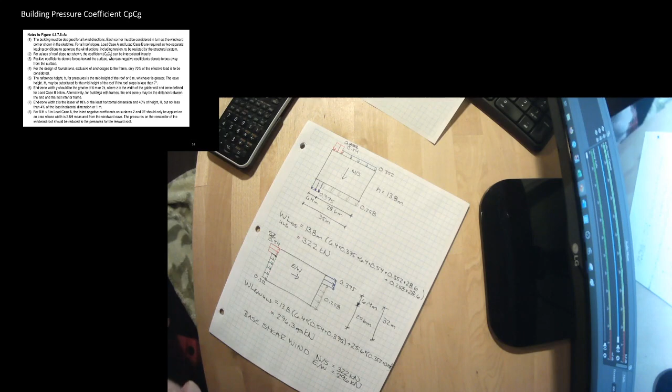We can calculate this all out, and we get 296.3 kilonewtons. So our base shear changes depending on direction - that makes sense because there's more surface area in this direction than there is in this direction. I think that was all for the wind calculation we needed to do. Let's write ourselves a little note here: our base shear for wind, north-south equals 322 kilonewtons, and east-west equals 296 kilonewtons. Literally the building department asks you to put that on your drawings.

Talking about seismic loads - seismic loads have a really in-depth analysis process. When I say structural engineering hasn't had that many changes or developments in the past 150 years, one of the places that's not true is seismic loads. Our research and study into how buildings behave due to seismic loads has really come a long way, and most of that has to do with our ability to analyze the problems.

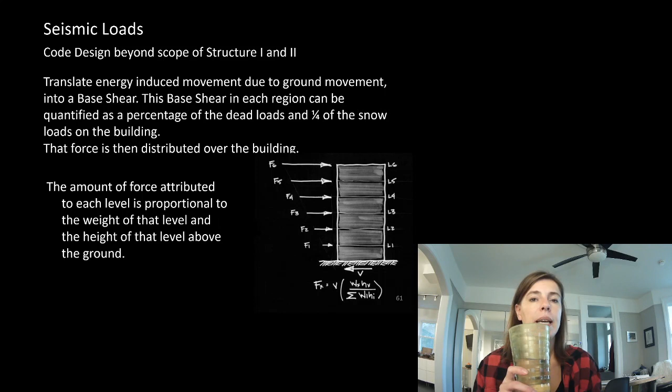People, if anything, limit the seismic load on a building because they're actually trying to throw their weight in the other direction as the building's moving. But we can't depend on people being in the building. So the worst case would be an empty building with all of its weight, in a snowstorm, but only about 25% of the worst snowstorm happening when this worst earthquake ever would happen.

Our earthquake event is 1 in 2,500 years. So every 2,500 years is our seismic event.

We're going to do an example where we take the same building we've been using for wind, and figure out what the total seismic load is, assuming it's 12% of the weight. We calculated our dead loads on the roof and floors, and figured out the weights of the walls, all in kPa, so we can figure out the total dead loads on the building, and relate that as a percentage of the dead load to figure out our base shear.

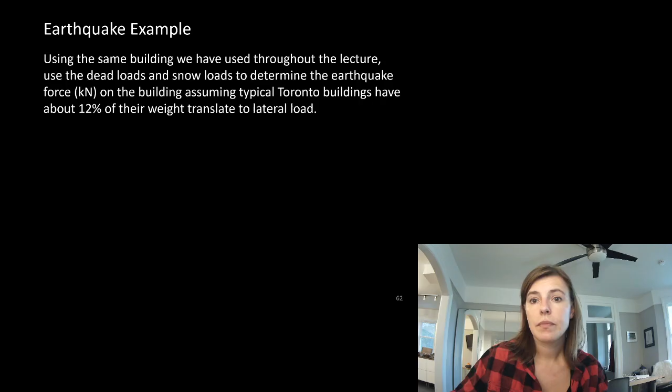Okay, our seismic example. This is not the seismic example, let me keep fast forwarding. For the same building we've been using throughout the lecture, we're going to calculate the dead and snow loads to determine the earthquake force on the building, assuming it's a typical regular Toronto office building, and it's about 12% of the weight that's going to translate to a lateral load.

So it looks like we need to figure out what the gravity loads are to make this work. So this is our quake example, or our seismic example. I'm going to write myself a little table here, just to keep track of things, like what the load type is.

And what the value is, maybe in kPa. I'm going to write myself out what the area is in meters squared, and then figure out what the total weight load is, or we'll call it P, the downward force in kilonewtons.

So we have our roof dead load. Do you remember back when we calculated our dead loads, we looked at the roof assembly, which was a metal deck with 4-ply and gravel on it. We had some insulation, mechanical and electrical, and some assumptions about the open web steel joists and the steel. We calculated that our dead load was 1.32 kPa. The area for that is 35 meters times 32 meters, which we've already calculated in this lecture to be 1,120 meters squared.

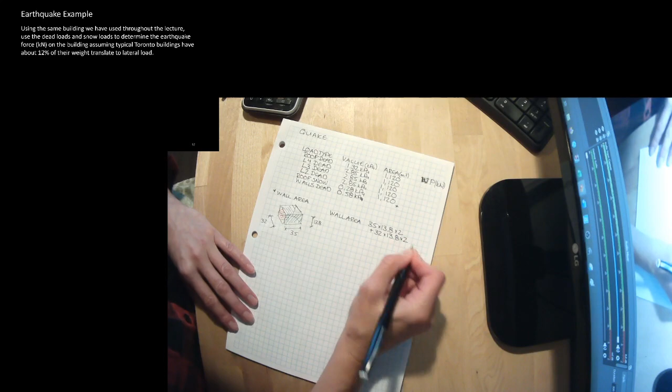So essentially what we're saying is that the wall area is the entire perimeter surface of walls. So we have 35 meters times 13.8, and we have 2 of those, plus our other side of our building, our 32 meter dimension, times our height, times 2 of those. So our total area for our walls is 35 times 13.8 times 2, plus 32 times 13.8 times 2, or 1,849.2 meters squared.

We can now calculate what the load is for all of those. 1.32 times 1,120 equals 1,478. 2.85 times 1,120 is 3,192. All of these floors were the same.

We had a quarter of our snow load at 0.28 times our 1,120, or 313.6. And then we had our walls, which weigh 0.58 kPa, times all of the wall in the building of 1,849, and we get 1,072.5 kilonewtons. We want to know what the total is here.

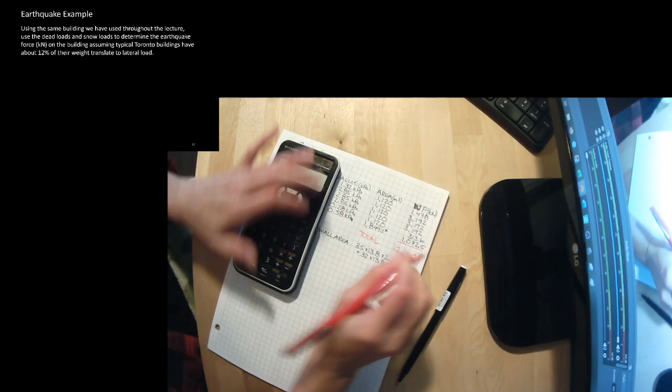So this is the total gravity load that is going to contribute to earthquake. So we have 1,478 plus 3,192 times 3 plus 313.6 plus 1,072.5. We get 12,440.1. So the weight of our building, the total dead load of our building, so that's the floors, the roof, the walls, plus a little bit of snow, is 12,440 kilonewtons.

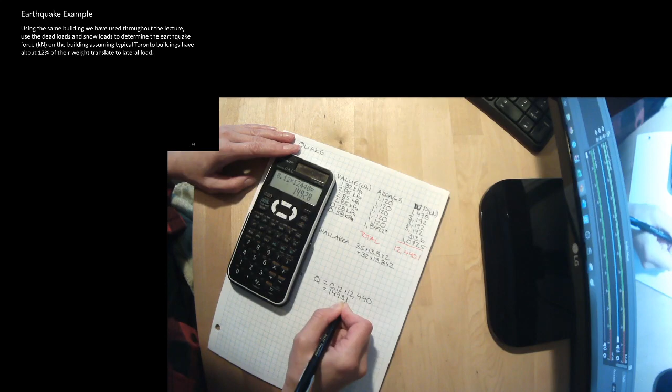We've been told that seismic in this zone is 12% of gravity. So our seismic load is going to be 0.12 times our 12,440, and we get 1,493 kilonewtons. So our base shear due to seismic is 1,493 kilonewtons.

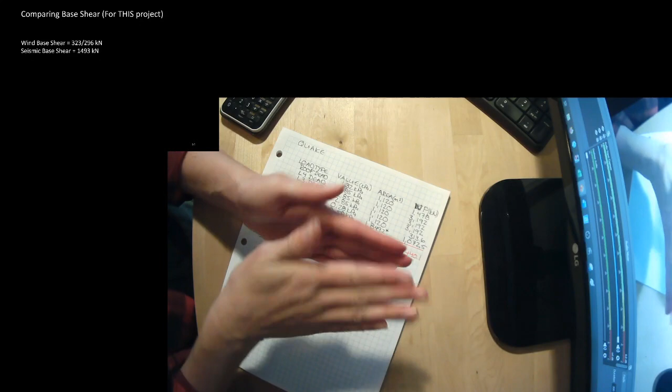You can see how that chart worked out here. Our wind base shear for this project was 323 or 296 depending on the direction. Direction for the seismic load doesn't matter. If it's a percentage of weight, your weight doesn't change depending on what direction the seismic load is going. So you can imagine if you had a narrow, long building, in the long direction you have lots of opportunity to stop that earthquake from tipping you over. But in your narrow direction, that same seismic load could have a really big impact.

So that's why it's really important to compare your wind and seismic base shears and understand what they are. You could have that long, narrow building where your wind load is the worst in this direction and your seismic is the worst in this direction. It's going to be really badly impacted in that direction. So it's just helpful to take a look at what those base shears are.

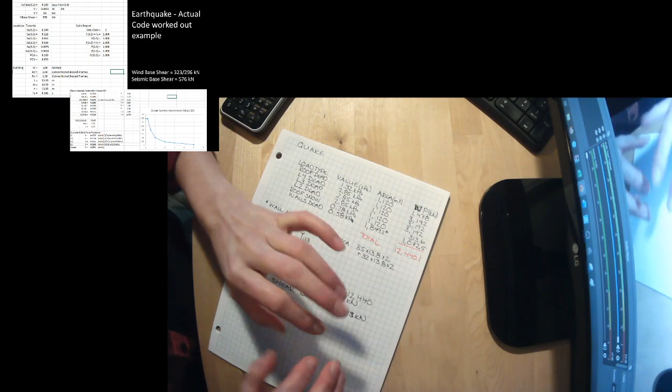So depending on the type of building it is, we could have a much lower load. But in some conditions, we were under-designing these things, and now we need to over-design them. In fact, in northern Quebec, a lot of the masonry buildings that were built in the 40s and 50s have since been discovered to be very much under-designed for seismic loads. And there is a big remediation project happening through all of northern Quebec, where they are going in and modifying the building to be able to resist these seismic loads the way they now actually expect them to be impacting the building.

Now, I'm not going to test you on this method, but I wanted to show you what the calculations look like for doing this if we were following the code.

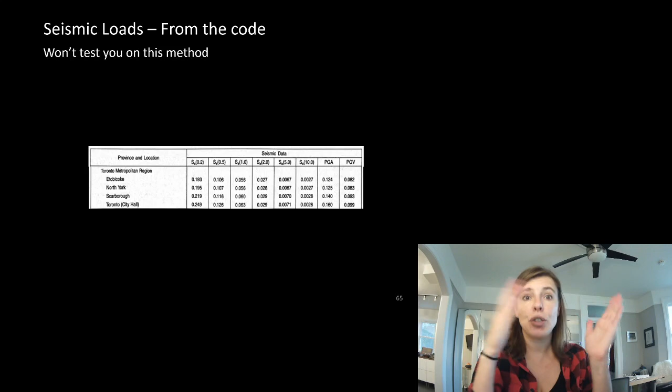What we get is our spectral acceleration of the ground, basically how much the ground is actually accelerating. It varies depending on the period of the thing that's on it, so the impact of how much the ground moves is actually dependent on how much the thing moves. They have kind of a feedback loop. So if the thing can move quickly, we have a different acceleration that we use for the ground, because we're pretending that the building is staying still and we're throwing a force at it instead.

That's all way beyond this. There are people that devote their kind of career to seismic concepts.

What I wanted to show you was kind of the calculation that we go through. Now, this is a condensed quick version of it. Each one of these things has multiple calculations going into it.

But what we do is we say, okay, let's pull the location. So this was a building in Niagara Falls. This isn't even, well, this actually should say Toronto here. This is actually one that I had a project that I took and adapted it to make it Toronto. So the location is actually Toronto.

This is, I don't know what slide. So I pulled the spectral acceleration values for Toronto, but then I figure out from the soils report what the site class is, which has to do with the behavior of the soil. And then I see how those same spectral accelerations actually propagate through those different types of soil materials.

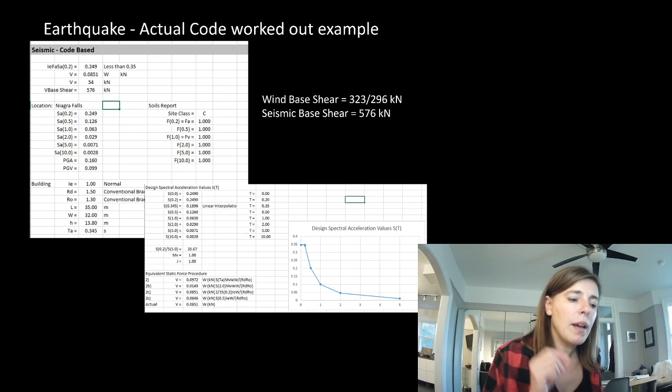So you do not have to go through this. The one comment we got in accreditation was that I didn't make you do the code version of the seismic design. I don't know any courses that would make students do that, because for me to do it for a building is half a day's work. I can't imagine making you guys do it when I understand the code and I've been through it a bunch of times. But I did want to at least show you what it incorporates, that we have to know information about the region, information about the soil at that particular spot, and have an understanding of our building's behavior.

And then all of those things can combine to figure out what actual seismic load we would put on the building.

So that really sums up what we wanted to talk about today. I know it's a lot to be thrown at you all at once, but the big takeaway tips here are that you should be able to figure out your live loads, you should be able to figure out your dead loads if somebody tells you what the assemblies are, you should be able to calculate snow load for your building, maybe not with the accumulations, but the basic snow load, and you should have an idea on how to calculate wind and seismic.

You are going to have to do one wind calculation, but I'm not going to make it that difficult for you guys to kind of get marks on that. And for seismic, you should just have a grasp that it is dependent on the acceleration of the ground, which is related to gravity, so we relate it as a percentage of gravity.